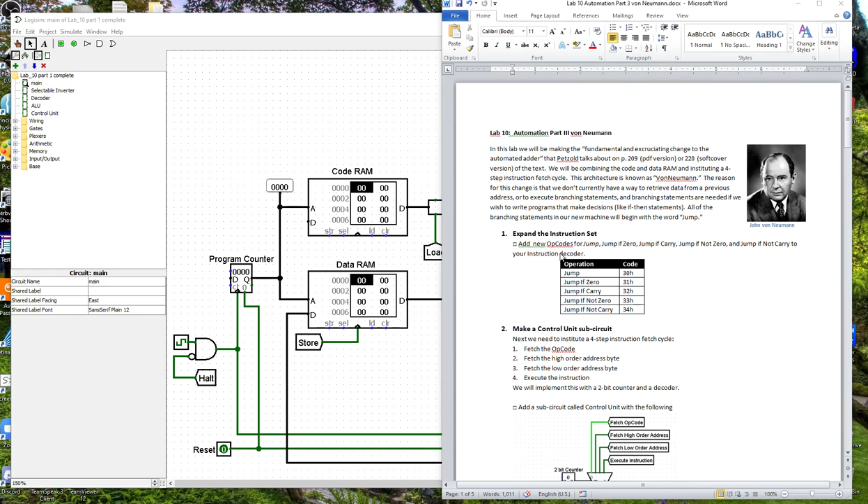Last week we did parts 1 and 2 for lab 10. We made the decoder and added 5 opcodes, the jump opcodes. We also made a control unit, which incorporated the decoder and was the way we instituted this 4-step instruction fetch cycle: the first step gets the opcode, the second gets the high order address byte, the third gets the low order address byte, and the fourth executes the instruction.

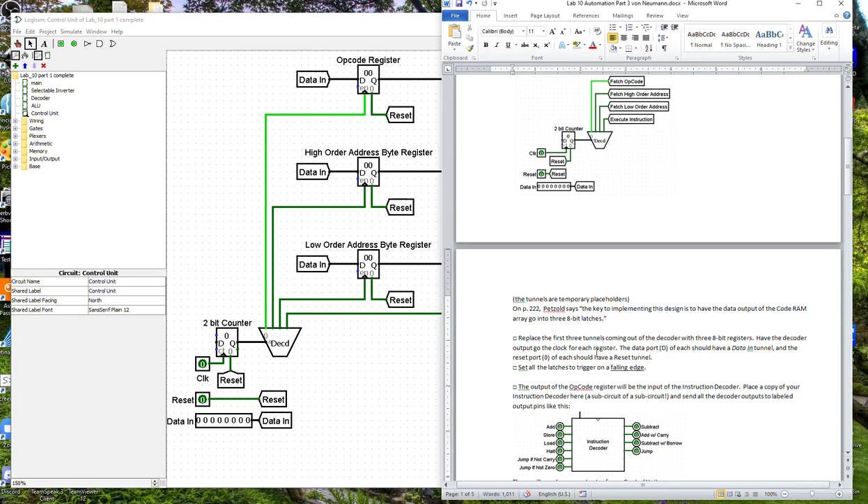So now we just need to finish this up. We have one more circuit to make, a program counter sub-circuit, and then we get to modify the ALU a little bit and put it all together with this beast.

One thing I did without you last time: the way we left it, this was a little more scrunched together, so I moved these pieces around. I moved them to the right because I know looking forward to the end of lab 10 we're going to need more room to put in this control unit, so I moved things to the right and put the instruction decoder flat like that, but otherwise no changes.

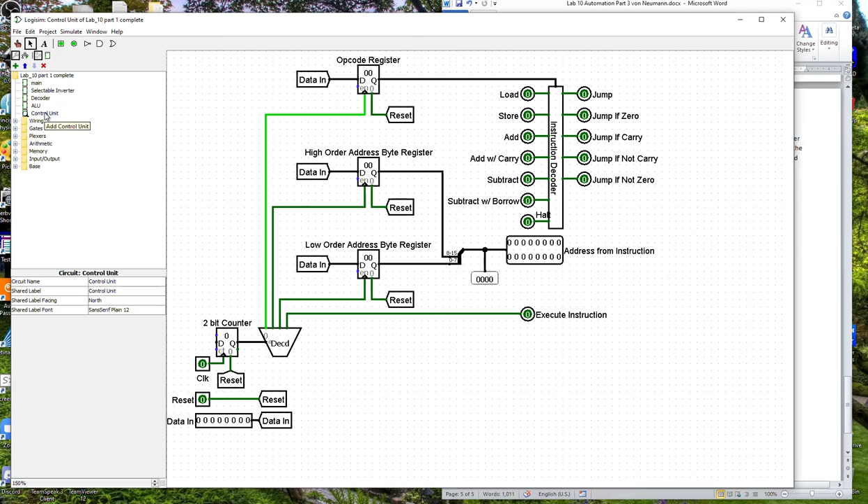If you haven't yet made the control unit or added these opcodes to the decoder, please look at last week's lecture to do that.

Okay, so the first thing we need to look at is step 3. We're going to make some modifications to the program counter. Right now we're just using this program counter as a dumb ring counter.

Do you remember from your last lab, the ring counter lab, two labs ago, we didn't have this. Our ring counter just worked like this: you'd just make the clock go and it would count. Oops, what's going on, I took out some stuff.

I forgot my feedback loop here. It just made the counter increment from 0 to 3, or whatever level we originally had these set at. But each of these latches has some extra capability that we weren't using.

One is, remember, each of our D-type flip-flops had a preset and a clear input. With preset we could set this to any value, let's say we wanted to start at 2. First let me clear this. If we want to start at 2 instead of 0, I could just set it to 2.

And then I start my clock. Now it's going to 3. Remember, this is the least significant bit, 4, and so on.

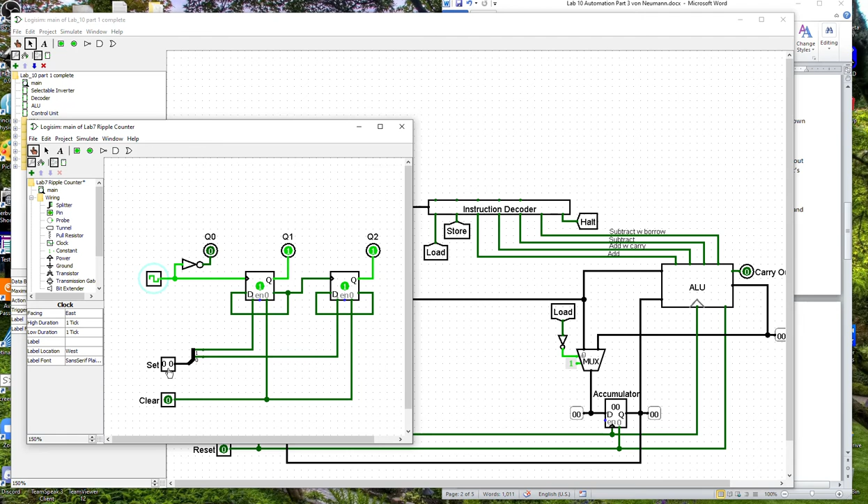So this is the capability we're going to use, and we're going to need this for the jump command, because we want to be able to set any address into the ring counter, to go to any of the 65,000 plus addresses in memory.

Okay, so to add some of this functionality to our program counter, we're going to take this out of our main circuit, and we're going to make a new circuit called program counter.

And I just hit Control V to paste that back in there. It's still a 16-bit counter, good. And to have all the functionality we had before, we're going to need a clock input.

And we're going to need a reset. I don't know why it keeps doing that.

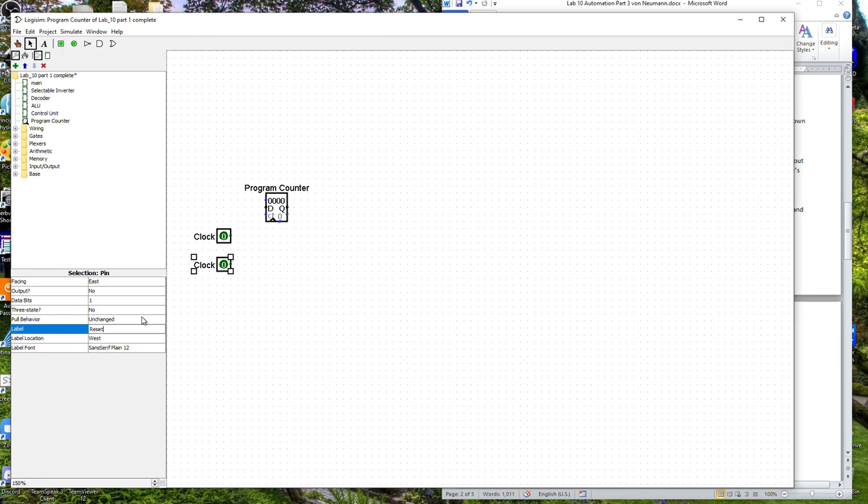Oh, and we need an address out. Remember, the circle is the out, and it's a 16-bit address, so 16 is right there.

But, yeah, 3-state, no, good. Okay, I'm going to give that a name.

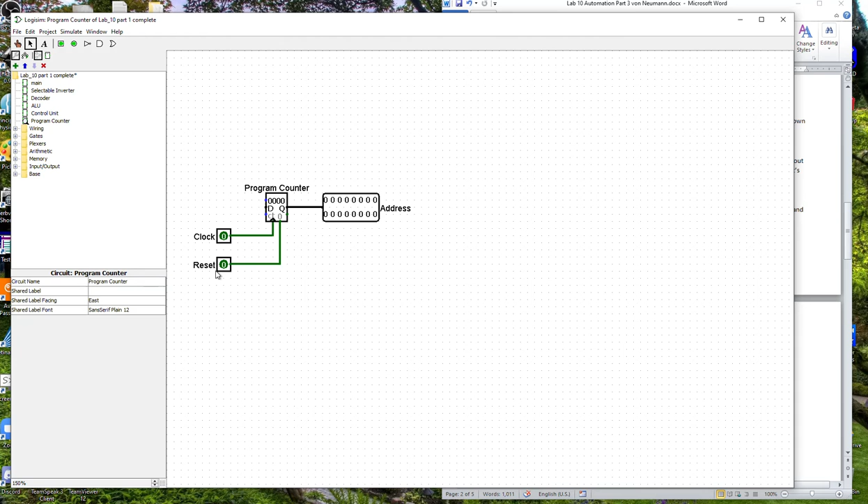All right, well, let's see what this looks like. Let's put these down here. What is this anyway? That's my reset, and that's my clock. And that's my output. Alright, good enough.

Let's put that in our main circuit now. Everything hooked up? Yes. Okay, so now I should have the same functionality I had before.

Let's maybe call this, come on. I'm trying to get fancy here with my escape codes and I used the wrong one. Wow.

Anyway, okay, so it finally worked. The backslash n is an escape character. Remember from early chapters in Petzold we talked about this. You've probably already seen this in your JavaScript class, but I wanted to make it 2 lines instead of 1.

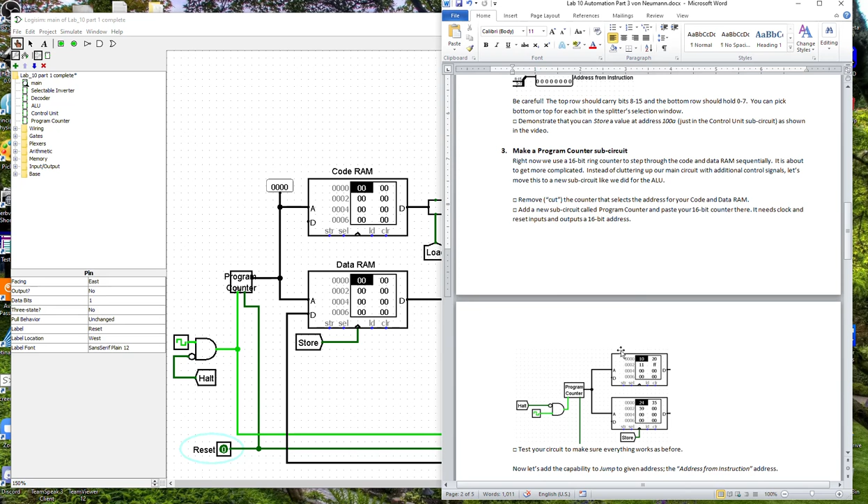Okay, now we're going to add some more capability to the program counter using the set and reset options. I hope you'll agree that I've outlined the reasons why we need to make this complicated looking circuit, but basically we just need to make this circuit.

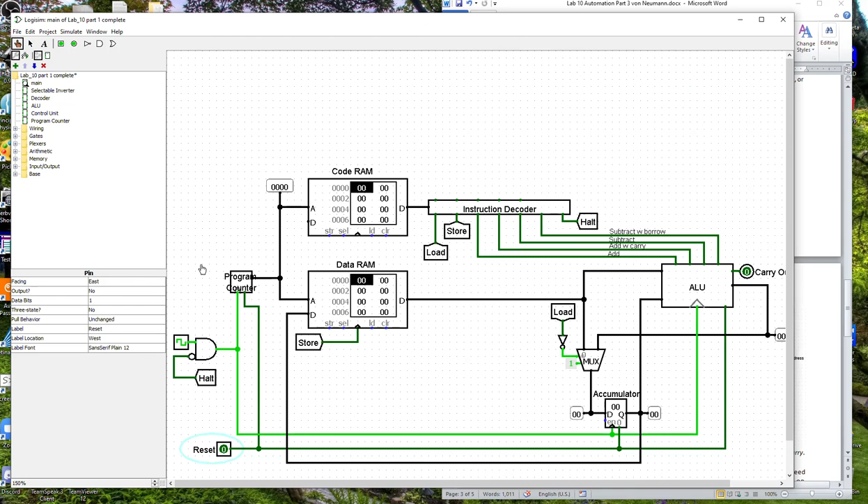I'm going to go ahead and do that off camera. I think that you're familiar enough now with Logisim that you know how to insert all of these things, including the multiplexer. So I'll go ahead and do that, and I'll see you in a minute.

Okay, I'm back, and I've just copied basically the circuit from the lab into Logisim. The only sort of strange things to mention are that this register needs to trigger on the rising edge. That's it. Okay, so there's this part of the circuit here that I haven't filled in yet, which I'm asking you to do.

But before I do that, I just want to walk through how this circuit is working. Because if you remember, on our 4-step instruction cycle, we have 3 steps where we're going to memory to get the opcode for the first step, to get 2 bytes for the high and low order bytes for the memory that we want to go to, that the instruction refers to.

For example, if we want to store something, then the next 2 bytes are going to tell us where to store that. Or if we want to load something, the next 2 bytes will tell us where in memory to go to retrieve that information.

So the 4th step in that instruction fetch cycle, we don't actually want to advance the counter, right? Because we only have 3 locations in memory that have been used, 1 for the opcode and 2 for the memory that opcode refers to. So on the last step, the execute instruction step, we don't actually want to advance the counter.

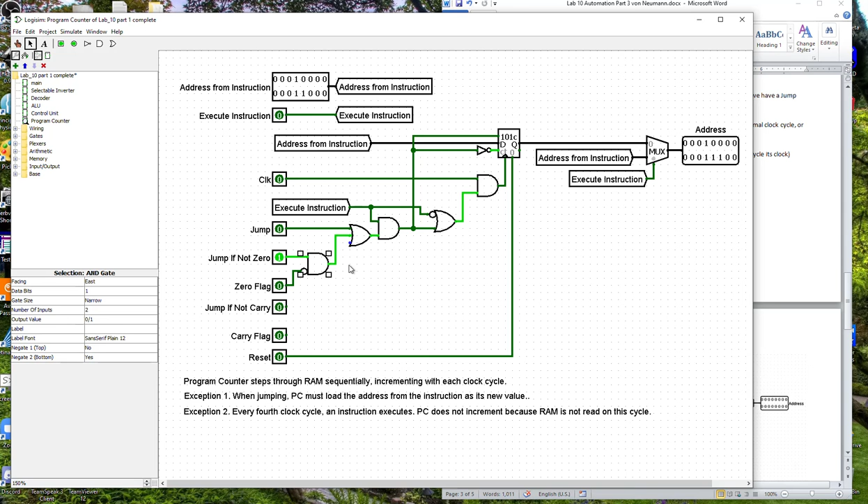Okay, now if the zero flag is not set and we have a jump-if-not-zero command, then jump to that address. I pulled this out to fix that double overlap. Think about what this situation needs to be—it's not going to be very different from this one. Go ahead and implement that in your program, and then we'll be ready to give it a shape.

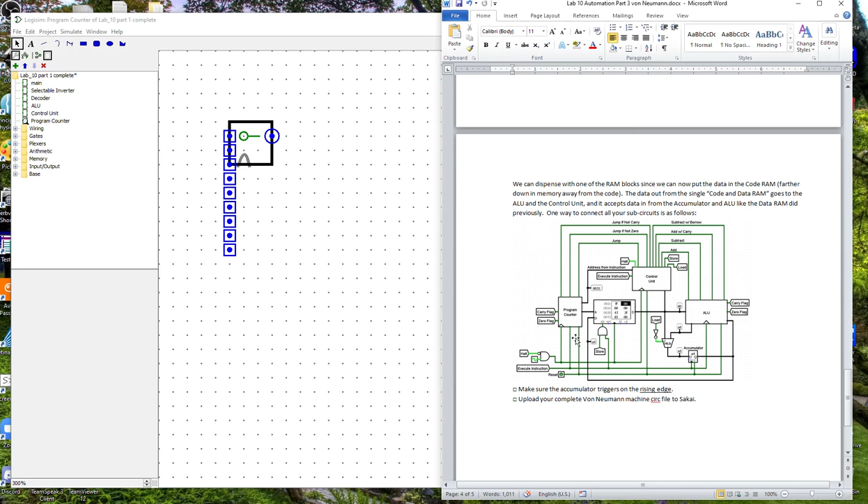I'm guided by the picture at the back of the lab. We're working on the program counter, so we want the program counter inputs to be like this, where our jump instructions are across the top, our flag outputs on the left-hand side, clock, reset, and execute instruction at the bottom.

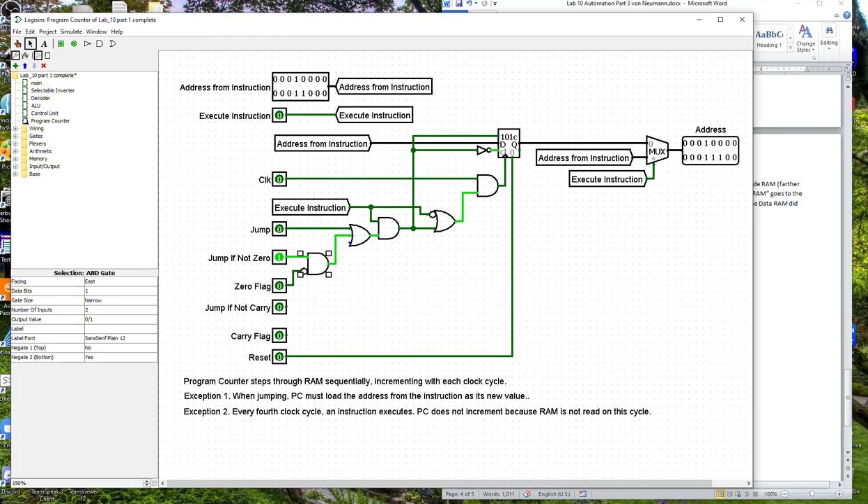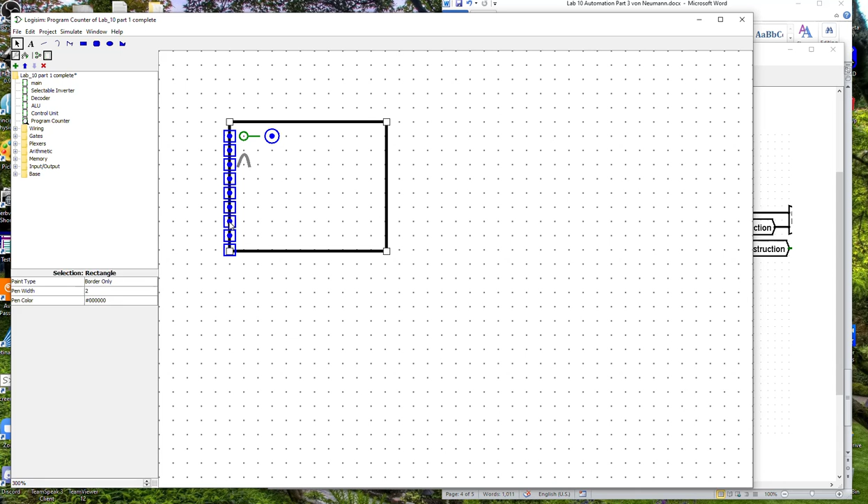I think we went over this last time, so I'm not going to bore you with those details. But what I found to be a really useful trick is to use a tool like Snagit to take a picture of this, so I know what I'm looking at when I go to this other screen. If I'm trying to drag these inputs and I click, it's tiny and really hard to see—can you figure that out? No, you can't, unless you're looking at this picture. So I'm going to do that off camera, and I'll be right back when that's done.

Okay, I'm back, and I've modified the shape so that these outputs match the picture here, where I've got all my jump commands on top and my carry and zero flags on the left-hand side. And then the output is here in the middle, and the data in is in the upper right-hand corner. Great, so that finishes up number 3.

Now we just have to modify the ALU a little bit. If you did the last lab, your ALU will look like this—it's the ALU we had for the Harvard machine. One of the things I had to do was have these two 1-bit registers, and part of the reason was because after an add operation, we used every cycle of the clock to do something, and if we weren't actually adding something, that carry out would be lost.

And now we don't need this anymore, right? Because one of the advantages of this system is that, as you'll notice on the last page of your lab, instead of the clock going to the program counter and the ALU and the control unit, the only thing that makes the ALU and the program counter advance is the execute instruction. So the ALU clock has now been replaced with the execute instruction command.

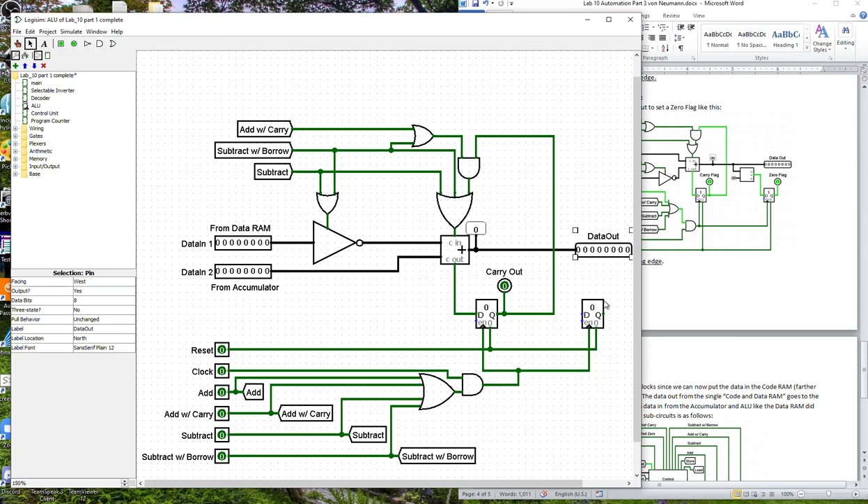Alright, so you'll notice in the lab that we're adding this comparator, and we are going to use the carry flag as one of our branching conditions, and the other thing we're going to use is the zero flag. So if, for example, we subtract two numbers and get zero as a result, we can use that as a basis for making decisions. In fact, it's surprising, but all of the if-then statements we can create with a program like JavaScript can actually be implemented in machine language just with these flags.

The carry flag and the zero flag—we'll get to test that out by doing some machine language programming ourselves next week, provided that you have a working von Neumann machine.

Okay, so the comparator is in the arithmetic section on the left, let's put it here. I want to look at the output and compare it to zero. You can pull up the help if you want, but these outputs are self-explanatory—it'll be high if A is greater than B, and this is A, and that's B. So I want to compare it to zero, to see if it's the same as zero or not the same as zero. So I'm going to be looking at this output.

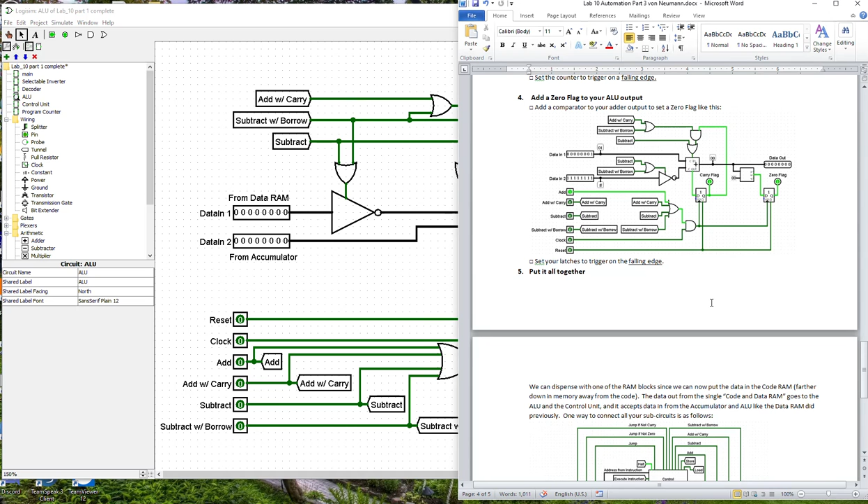Make this face out. Okay. Great, I think our ALU is done. That's the only change really to the ALU, right? Let me just make sure. Yes, set your latches to trigger on the falling edge. So let's make sure - that's rising edge right now, so that needs to be falling. And that needs to be falling. Okay, yep, fantastic, we're done with 4.

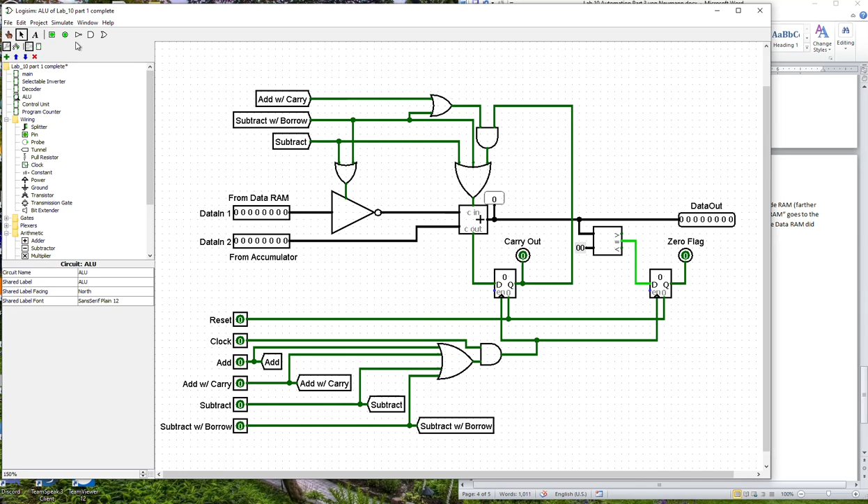Now we get to do 5. So we get to take all of our - how does this look anyway? Oh no, we have a new output here. What is that? That's my 0 flag. And where do I want that? On the right. That's carry, 0 is right below it. And that's my output. Boom. Okay, great. So...

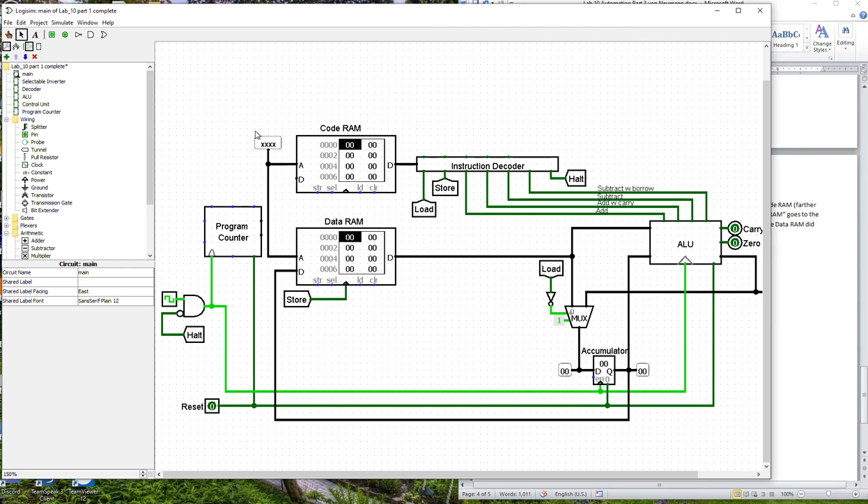Clock, what is that? Reset? No, execute instruction. So I need an execute instruction input, don't I? Oh no, that's going to come from our instruction decoder. Oh, we're getting rid of a lot of stuff. In fact, this goes away now.

Oh, so much of this goes away. This isn't the data RAM anymore, it's just the RAM, because there's only one. Remember, that's one of the two main characteristics of von Neumann - we just have one RAM for both code and data.

Let's see, what else can we do? Well, let's put our control unit in. Control unit, program counter, ALU. Yeah, looks good. All right. So, gosh, all right.

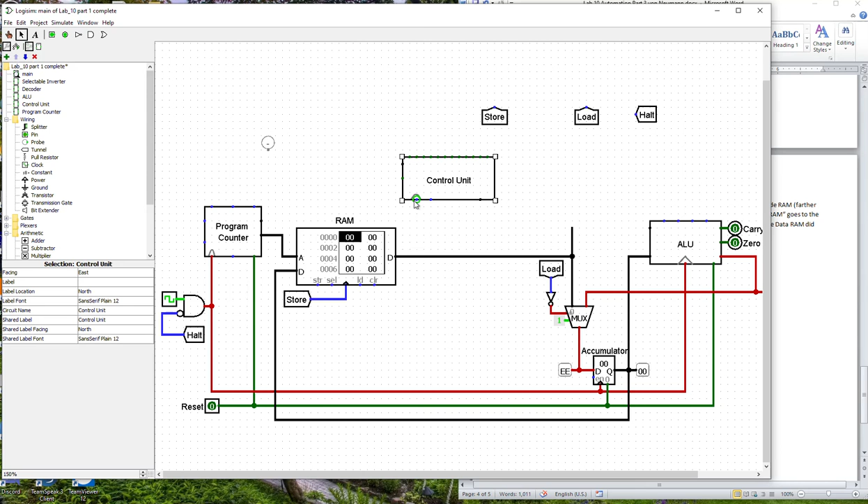So that's our address out. This is the address that we're going to get from the control unit, and I forget where that output is. Let's see, that's the clock.

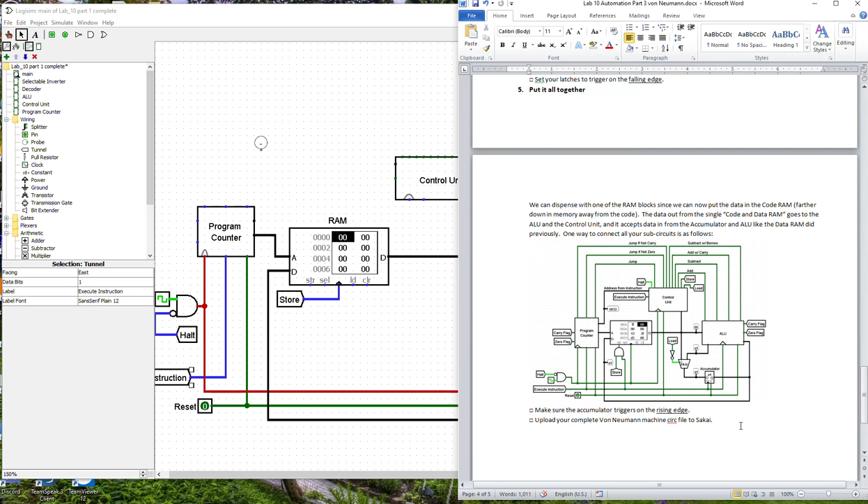I'm going to put a tunnel here. It's more of a label than anything at this point. Yeah, that's going to be the clock for our accumulator.

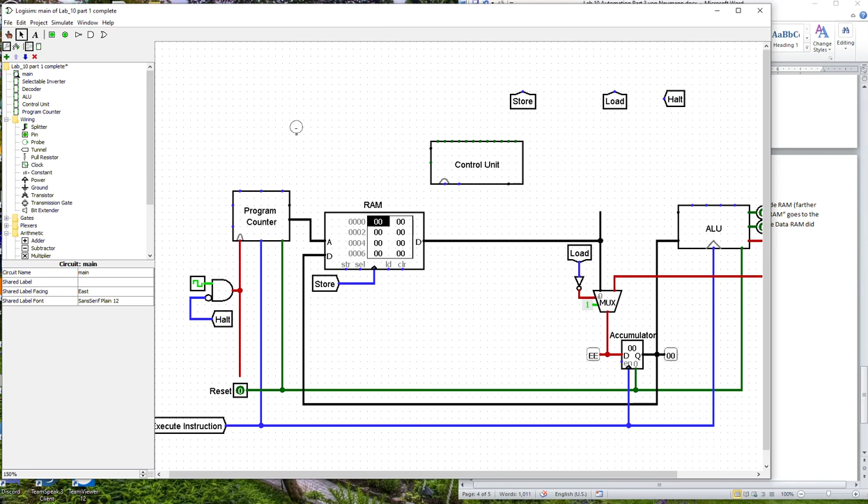And for our ALU, okay, it looks like we need to run the clock to memory and to our ALU. No, wait, no - to the control unit. Come back.

Is it going anywhere else? Nope. Okay, and then I'm just going to wire the rest of these up. This is my address from instruction. That's the address from instruction, output, address. Okay, all my jump commands are here. So this should be jump, which is this one.

Somewhere - looks like maybe I got it in the wrong place. This one's jump if not 0. And this one is jump if not carry. These are our flags.

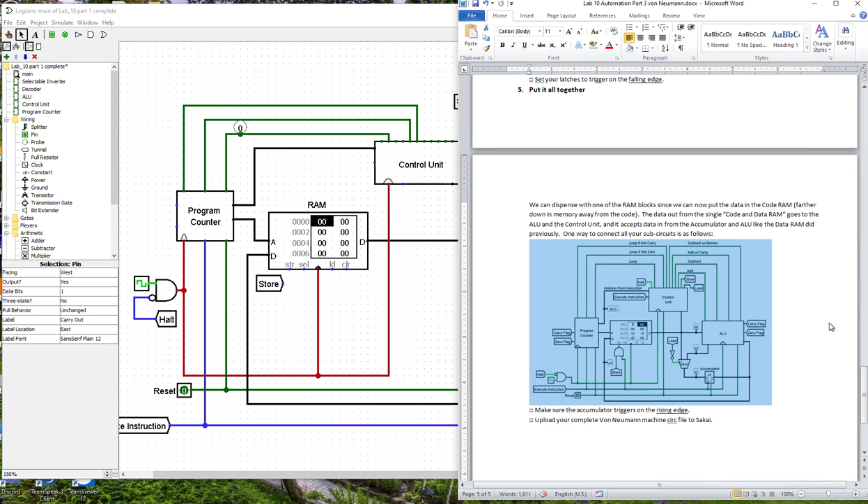Oh, we use tunnels. Using Control C and Control V, and then the right arrow to turn the thing around.

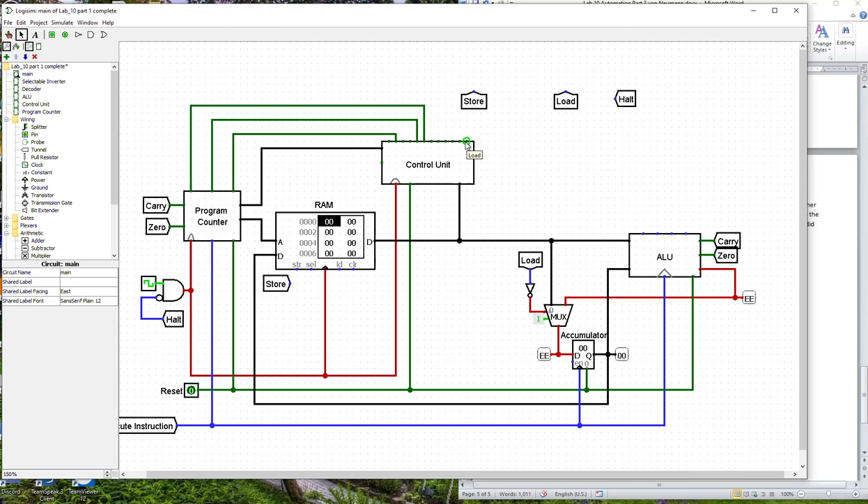And these are load, left arrow, store, using left arrow.

Okay, I think this is kind of boring to watch, so I'm going to skip ahead until I've finished all these connections. I'm just making sure that these outputs match these inputs.

Okay, I matched all the outputs of the control unit to the inputs of the ALU. Now I've got to give it an execute instruction right here. So I'm going to copy this tunnel. And looks like we are done.

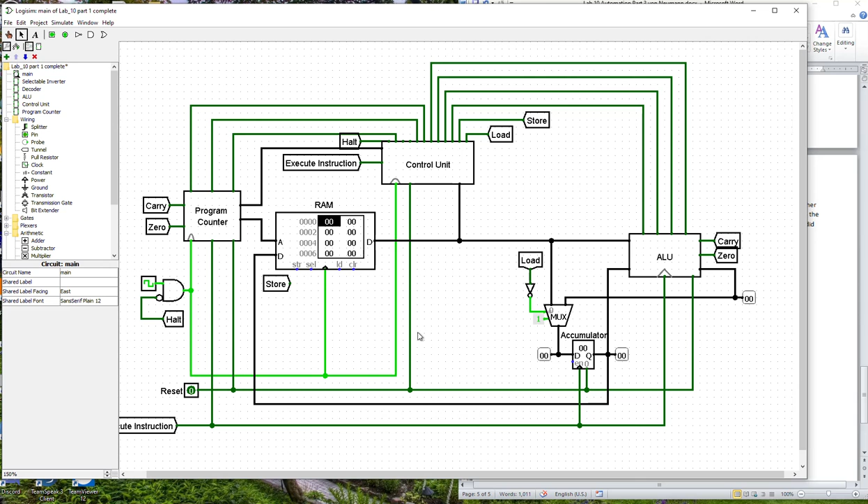Woo! Okay, so let's try this out now. Let's see if we can actually program it to do something. The simplest thing I can think of to do is add two numbers together and store them at some other memory address. So now we're going to use the awesome power of the von Neumann architecture.

Oh, it looks like I left something out. Sorry. Okay. Store - right, we're using this store functionality. This store if one, stores an input to memory. So...

It's not enough that we have a store command to actually load something into memory. We have to have a store command, and we have to be on the execute instructions step. And so we just need to put an AND gate in there to make that happen. Execute instructions right here. Something like that.

Okay, it doesn't look like I left anything else out. But let's find out. Let's write a program.

So load is 10, I think. I'm just using the keyboard to type these in. And now we need to tell it where to load the data.

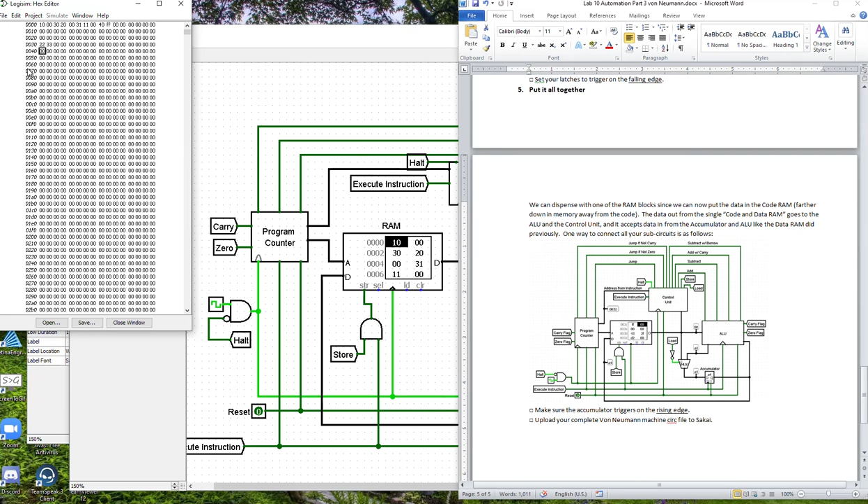So when you're done writing your program, go File, Save. And you can also cycle through the memory on here.

If you hit the Enter key, well, with the poke tool, if you hit the Enter key, it will go down one address line at a time. If you hit the backspace key, it'll go up.

But anyway, I think it's much easier when we're writing these programs to use this. All right, let's give it a go. First reset to start at 0, and then let's start our clock.

So it correctly read load, and it should have loaded a 10 into the— it should load a 10 into the accumulator. Oops, what am I saying? No, we're going to go to 0030, and whatever's at 0030 is going to get loaded into the accumulator.

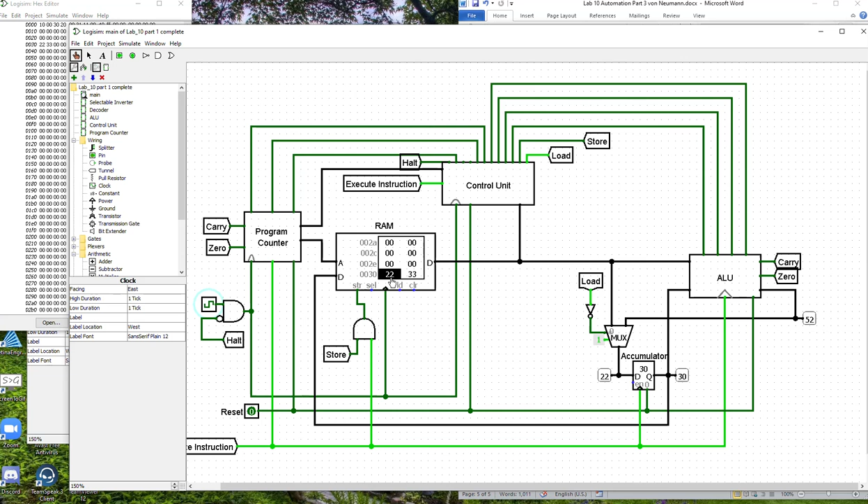So second fetch cycle, fetch the high order byte. Third is fetch the low order byte, and now let's— hopefully it zooms down there to memory. It did. Now it's at 0030, and it just loaded 22 into the accumulator.

That's execute instruction. Okay, now notice that we're back to 3, right? Once the jump command was no longer lit, it goes back to its normal programming, which is just incrementing the counter. And the next address is 003, right? This is 0002, this is 0003.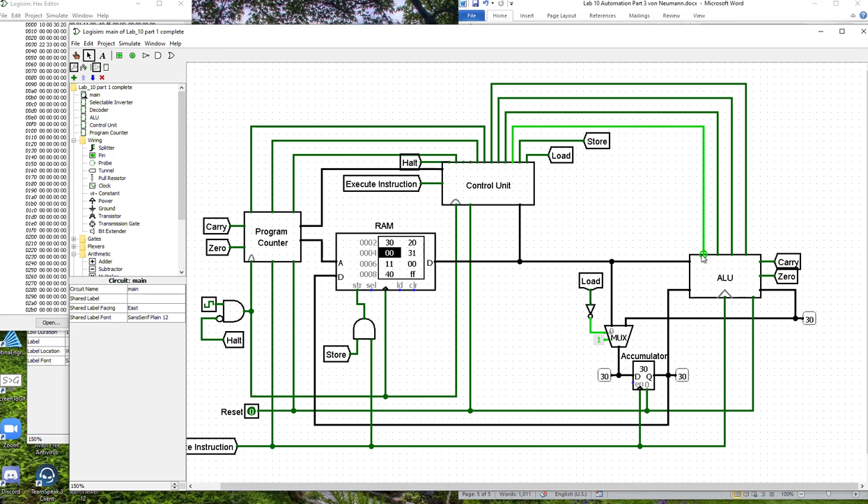And that's giving us an add operation. Let's see if it finds that. Yep, so that lime green indicates that the add—it might be convenient to put labels here. So add is lit, and now it's going to go to 0031 to get the data to add. Yeah, so it zoomed down here to 31, picked up 33.

And we should store the result, which should be 55. I'm a little distressed that I don't see this in the accumulator yet. At 0040. Okay.

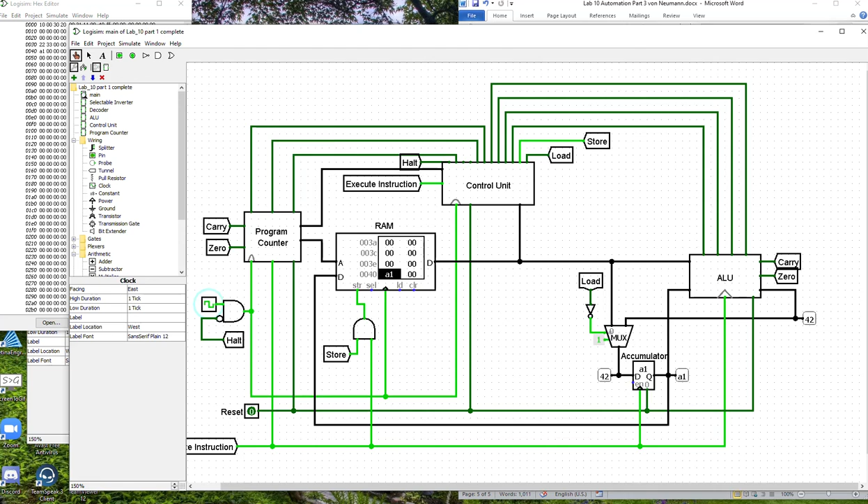Oh, I see, I made a mistake. Here, this is my—I outsmarted myself actually. This is my data out, and this is my data in too. I did that because I thought it would be easier to route things. So I've got to switch these lines around.

So that's my output. And that's what I want.

Okay, so it looks like the mistake I made was I forgot to set my accumulator to falling edge. So make sure you make that change, because with the Harvard Machine we're using rising edge for almost everything. So now the accumulator has to be set to falling edge, and I think we're in business.

Let's just do one more walkthrough on this program. So load whatever's at 0030. So it's loading a 22. That looks good. Next is add whatever's at 0031.

So it should go to 0031. It does, and it outputs 55. And then it stores at 0040. So yeah, perfect. And then we hit the Halt and no further.